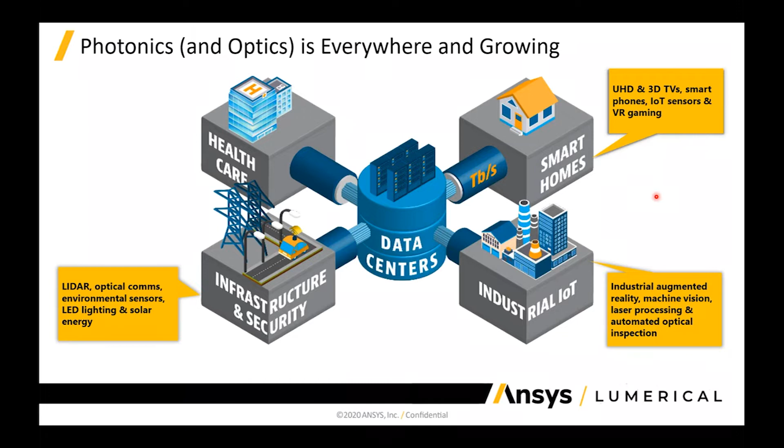There's the whole development on Internet of Things, sensors, virtual reality, augmented reality that use photonics devices. We have the same kind of application in the industrial field with industrial augmented and virtual reality devices, machine vision, laser processing, and so on. In infrastructures and security, LiDAR is widely used, especially if you think of autonomous vehicles. Then we have optical communication, sensors, lighting, displays, solar energy that use photonics devices.

In healthcare, all the work on medical imaging, diagnostics, lab on a chip, and again, augmented reality can help for enhanced surgery systems. And one of the fields that probably had a huge impact over the past 20 years in the photonics world is data center and optical telecommunication, where the race to get higher bandwidth, the fastest internet, with lower cost and lower energy consumption, led to a lot of work in the development of optical transceivers, optical storage, and so on.

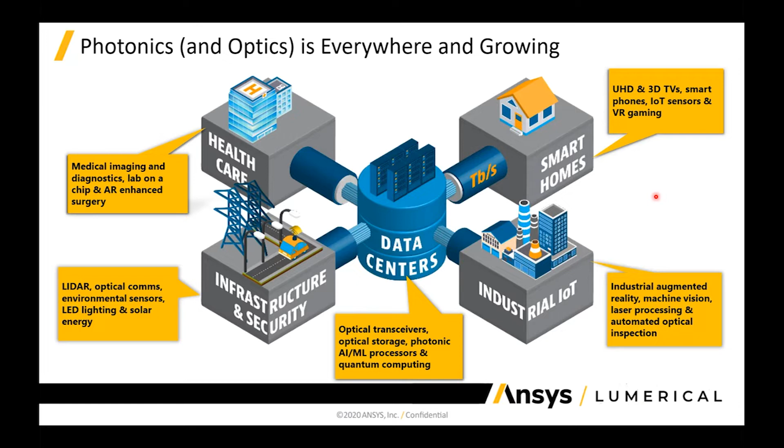So all these are different applications or different fields where photonics devices can be found, and all these different domains definitely pushed the development of simulation tools such as the ones we provide at ANSYS Lumerical. So in terms of the tools that we provide, we can simply split them in two categories.

The first one, which is more where Lumerical comes from at first, is the component level simulation tools, where what we are interested in is simply the physics of what is happening in your device. So there are optical solvers. There are also other solvers that we'll detail in a short bit. So again, here we are talking about a physical device, and we're solving the physics that are happening in this device. And on the other hand, we have the photonic integrated circuit side, the circuit and system level side.

In this case, we're not really looking at the physics behind all the different components, but the circuit. Similar to what we find in the electronics world, each component of the circuit is described by a behavioral model. These models, we'll see in a bit, can be extracted from the component level simulation. But this way of working using a schematic view of your circuit allows you to develop and design very complex circuits that can have tens, hundreds, or thousands of components, and then run the simulations, extract the characteristics of these circuits and optimize these circuits.

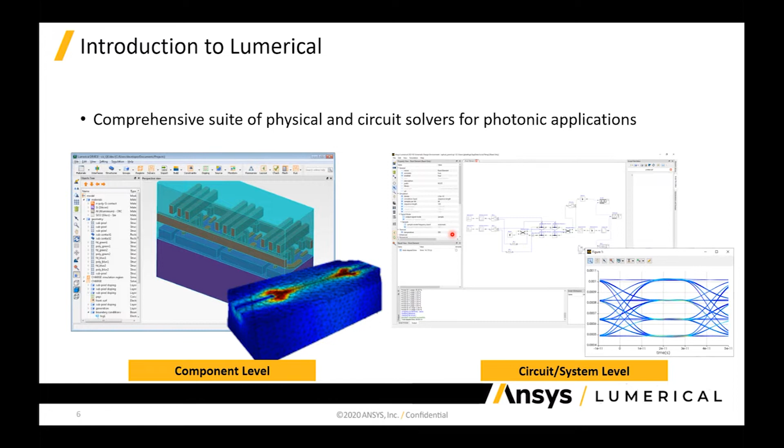So all these different tools share a common set of features. For instance, we have our own scripting language that allows you to drive the simulation workflow, create your structures, your simulation, run the simulation, and then extract the data to post-process and calculate whatever results you are interested in. And then we have an automation API available from the scripting language, but also from Python or MATLAB.

The automation API was designed with the idea of being able to run multiphysics simulations. As we will see in the next slide, our tools cover multiple physics from the photonics side, but also the electronic or thermal side of it. And when you're interested in simulating such devices, such complex simulation workflows, the automation API allows you to have one single script that will drive the full simulation workflow without having to open different scripts. You still have to run different simulations, but everything can be driven from that one single script.

Additionally, and based on this automation API, we have a photonic inverse design module called LUMOPT that allows the optimization of photonic integrated circuit components based on the adjoint method, and I will show a couple of examples later on. So all these features are shared by all of our products.

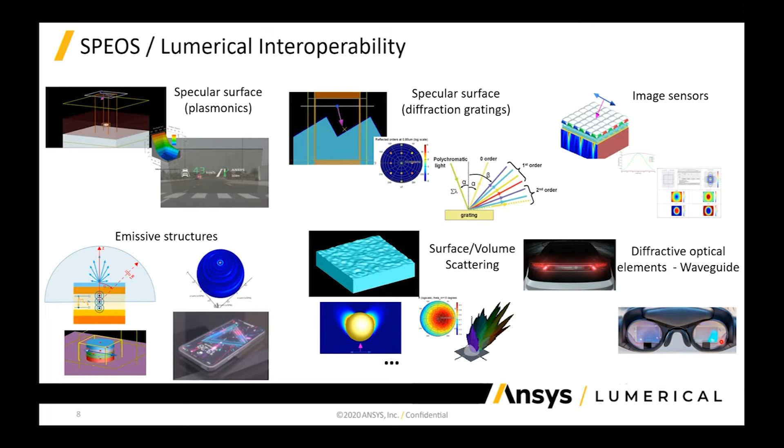And there's other types of applications that we are thinking of and we're currently working on, whether it's surface or volume scattering, where we can extract the BSDF from this surface with FDTD and use that in Speos, or for diffractive optics, like this grating, where we can calculate all the different grating orders, the strength of the different grating orders, and then the idea is to use that in the ray tracing simulation. And this can be used, for instance, in applications like this lighting in a car, but also in augmented or virtual reality applications. So that's for the interoperability with the ANSYS Speos ray tracing software. And that basically ends the part on the component level tools.

So now we're going from the component level to the circuit level with Interconnect. So Interconnect is our photonic integrated circuit, or PIC, simulation tool. As I mentioned earlier, in this type of software, we are not talking about solving the physics of what's happening in a circuit, because simply this would lead to huge simulations and it's not realistic to try and model that. So instead of using the full physics based simulation tools, what we do is we have a schematic view of the circuit, and each component of that circuit is represented by a compact model, a behavioral model. And these models can be extracted from the component level simulation tools, as I will talk about in a bit.

And so what Interconnect can do is simply simulate these circuits in the frequency domain and in time domain. So in frequency domain, what we can extract will be the transmission spectrum of the circuit, and in the time domain, we are more interested in things like the signal integrity and extract like the eye diagram of the circuit.

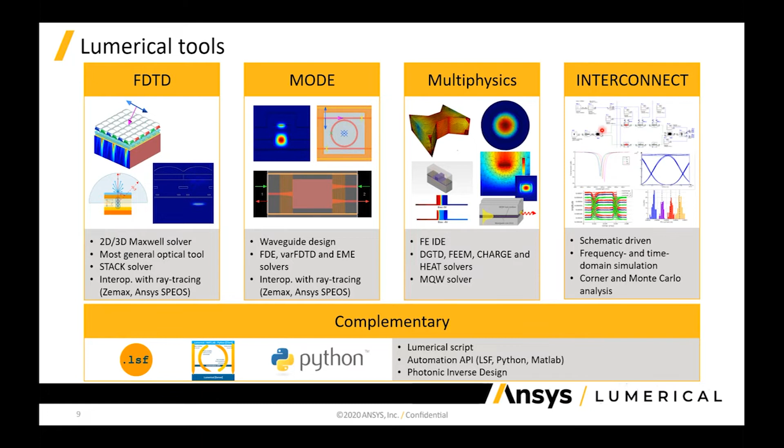Additionally, Interconnect supports statistical analysis, so we can run corner analysis and Monte Carlo analysis. The idea being to be able to determine the yield, the manufacturing yield of your device, your circuit. So, as I mentioned, we need compact models in order to describe the behavior of these different components. And in order to help generating libraries of compact models, we developed a tool called the CML compiler.

So the CML compiler is simply allowing to automate the generation of these compact models for Interconnect using simulation data, but also experimental data. So this is primarily designed for foundries or companies or groups that are developing, let's say, a fairly large library of components as part of a process design kit.

In this case, the advantage of using a tool like the CML compiler is simply because you can automate this process, it's much easier to deal with multiple iterations of your process and different versions of your libraries, and makes things much easier for that. So as I said, the CML compiler will generate compact models for Interconnect, but it also generates Verilog models that can be used in the electronic photonic design automation flow that we have with our partners from Cadence.

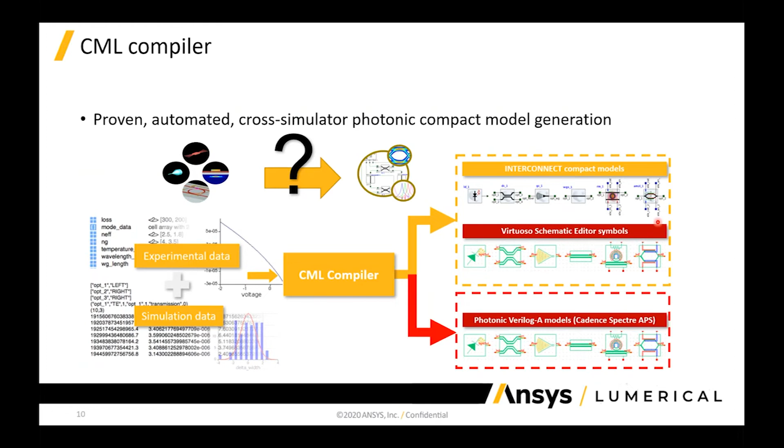So in this case, we're using the Cadence Virtuoso environment to drive the simulation. I'll talk about that in a very short bit. And since these environments will use Interconnect or can use Interconnect as the photonics simulation engine, we need a bridge between the Cadence view of the circuits, of the components, and the Interconnect library of components.

So this came up simply from a realization, and obviously we're not the only ones to kind of think about it. It's simply that there's a lot of similarities between what happened something like 50 years ago in the electronics world and what is happening now in the photonics and the integrated photonics world, with this idea of having a simulation workflow that is centered around the process design kits.

So the process design kits will include all the information about the manufacturing process, the design rules, the process data, the layout of all the different components that are available in this PDK. And most important for us at ANSYS Lumerical will be the library of compact models that will allow the simulation of these circuits using these models.

But the first thing when we talk about a process design kit and a library of compact models is simply that you have to generate these compact models. And to do so, you need photonics multiphysics simulation tools like the ones provided by ANSYS Lumerical, and also you have to be able to calibrate and characterize these components using measurements. And that's where the CML compiler can help in order to automate the extraction of the data from the component level simulations and the measurements to build these libraries of components using all these data.

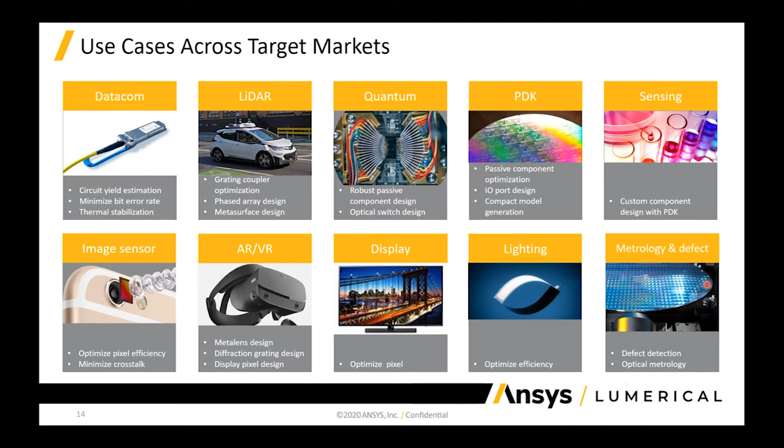So for the photonic integrated circuit side, we have datacom applications, LiDAR, quantum photonics, process design kit development, as I just talked about, as well as sensors. And then we have image sensors for cameras, like pixel simulations. For augmented and virtual reality, we can do metalenses, diffraction gratings, and display, like LEDs. These can also be used for display applications, so optimizing the emission of your pixels for lighting, and also metrology and defect. So I want to go over some of these applications in the next few slides, starting with the PIC side, so the photonic integrated circuits.

So the first thing when you talk about PIC and photonic integrated circuits is we need to talk about the building blocks that we need to be able to build a photonic integrated circuit. And the first building block that we have is simply the waveguide. Without waveguides, you don't have any photonic integrated circuit. So it's the equivalent of the wires on your electronic circuit.

So for the waveguides, we have the capabilities to calculate the modes that can propagate in a waveguide, and we see an example here, the SEM picture of a waveguide with a cross section, and here what would be the simulation of a waveguide. So in this case, we have something that is probably a typical silicon waveguide with a width of 500 nanometers and a height of 220 nanometers. And this waveguide supports two modes. We have the transverse electric TE mode and the TM mode with different mode profiles. So a tool like MODE can calculate these properties of these waveguides.

And then the other thing we need to know is how the light is propagating in your waveguide. So in an electronic circuit, we don't really care if there's a 90-degree angle in your cable because the electrons won't have any problem with that.

But you see that if we would do that with a waveguide, we would lose most of the light, and most of it would be reflected or lost. So we have to be able to model a bend waveguide and calculate, for instance, the losses due to these bends as a function of the radius. And these are the kind of things we can do with the FDE solver. We can analyze straight waveguides as well as bend waveguides.

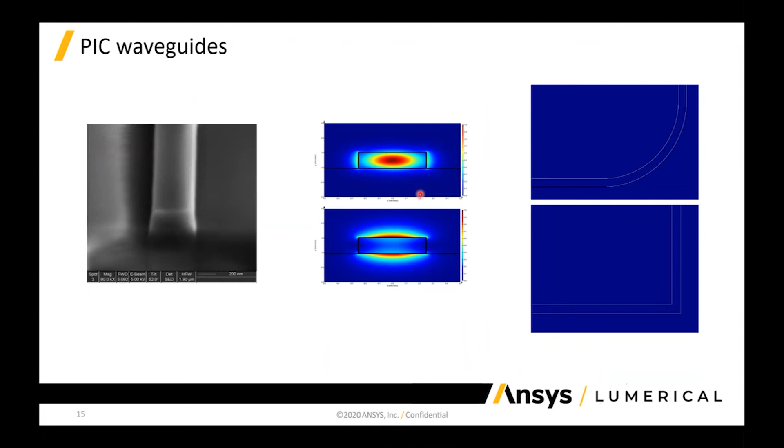So the waveguide is one building block that is very important. And then here we have other types of building blocks. So I will start with these ones that are the passive components. So we have this Y branch, and the idea of this Y branch is simply to split the light from one waveguide to two waveguides. And ideally what we want is a 50-50% ratio at each output here. And that can be done using FDTD or the varFDTD solver.

Another type of component that is widely used in PIC applications would be ring resonators. So ring resonators are simply filters that can be used like spectral filters. So we have an input waveguide and a ring, and the light from the waveguide will simply couple with the ring, and it will couple back and forth from the top waveguide to the bottom waveguide. And the ratio of coupling will depend on the wavelength of the light at the input. So again, that's something we can model with FDTD or the varFDTD solver.

Or we can even split that in different bits, like the directional coupler, where the light is coupling from the straight waveguide to the bend, and so on to build this structure. So those are two important devices. And then another type of device that we need in photonic circuits is couplers, like these grating couplers. The idea is that you need to be able to couple the light from, let's say, a fiber to the photonics chip that you have designed, and grating couplers are a great way to deal with that.

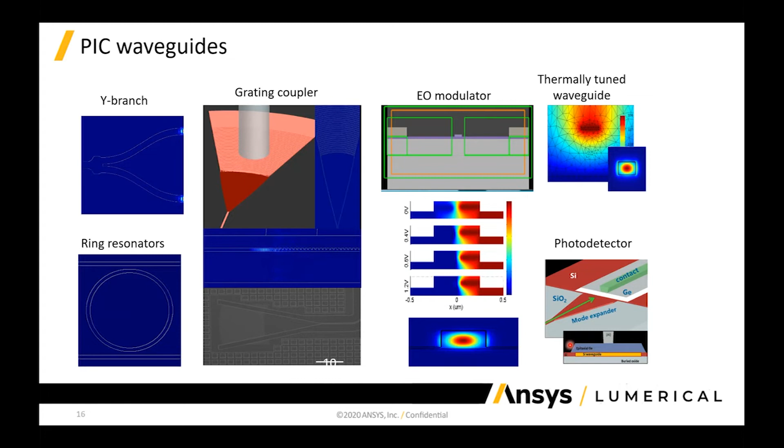So in the FDTD simulation, we can calculate what is the absorption in this germanium layer, and from this absorption, we can then input that as an optical stimulus in the CHARGE simulation to get the photocurrents. And we can also do some analysis to get the bandwidth of this device. I actually forgot to talk about that, but the charge transport solver can do steady state analysis, but also transient and small signal AC analysis that will allow you to get the bandwidth of the device.

So for passive components, one key thing is how we can optimize the performance of your device. So we have multiple tools that allow you to optimize the devices. One tool that we added with the automation API is the inverse design module, or LUMOPT, that is using the adjoint method to optimize the figure of merit. In this case, the coupling efficiency to the selected modes of your waveguides.

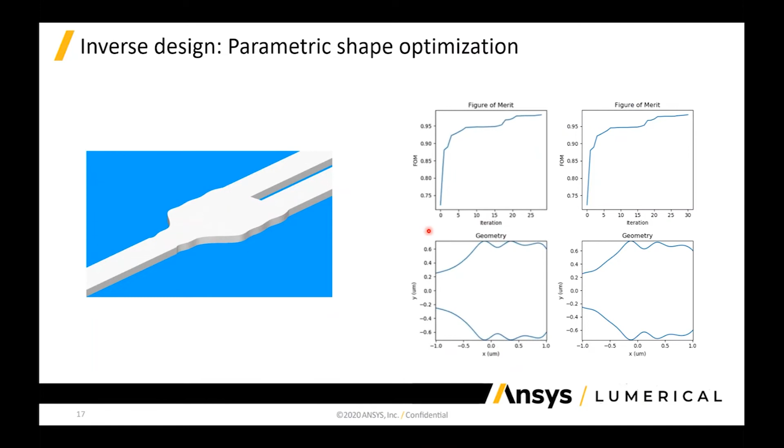So the inverse design can work in two different ways. The first way is the parametric shape optimization. So here, what we will optimize is the shape of this Y branch. You see, at each iteration, we generate a new shape and we calculate the figure of merit. And using the adjoint method, we can optimize fairly quickly this device and get about 100% transmission, knowing that here we are using the transmission in both waveguides, and we're using symmetric boundary conditions. So we know that the transmission is equally split between the two waveguides. So that's one way to work.

And the other way is using the topology optimization. And in this case, the work is completely different. What you optimize is not the shape of the device, but the index profile in a portion of your simulation. So we define a block, and at first, what we're going to do is simply vary the index in basically a matrix of pixels, and for each pixel, the refractive index can vary between two bounds.

The minimum value is typically the index of the cladding, and the max value will be the index of the waveguide. So the first step is a continuous variation where each pixel can take any kind of value, and then we need to discretize that because you can't really manufacture a device where there's a continuous variation of the index. So we discretize that to get a step index type of profile.

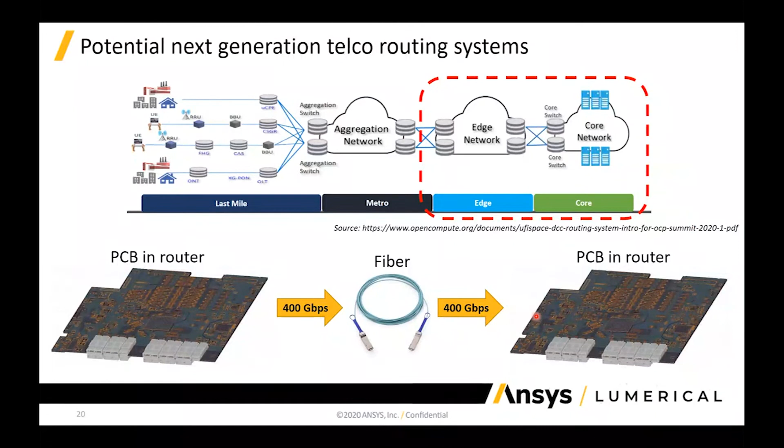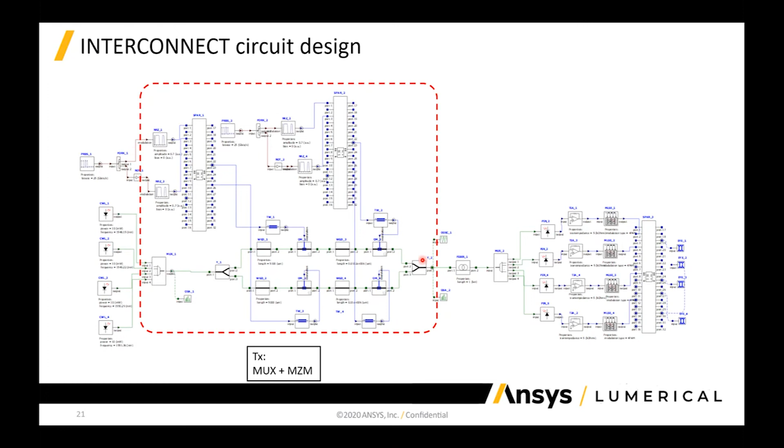And this is a view of the circuit in INTERCONNECT. We have different things. We have the transmitter side, where we have a bit sequence, we have optical sources, and we use all this to modulate the light, convert this bit sequence into an optical signal that is then sent to the fiber.

So what are these different components? We have the PCB here, where we convert the bit sequence into an electrical signal. This has been simulated with HFSS, and we extracted the S parameters of the PCB to, from the bit sequence, get an accurate representation of the electrical signal that will be driving the photonic circuit.

That is symbolized here. We have the traveling wave electrode that I talked about two slides ago. We have the optical modulator, or the phase shifter, and we have the Mach-Zehnder that I was talking about. We split the light here. We have the 2 arms of the Mach-Zehnder. We control the phase of each of the arms, and that allows us to modulate the light at the input of this modulator.

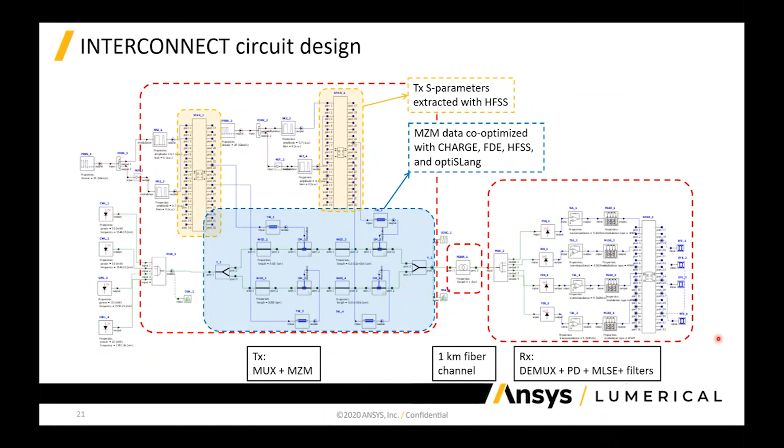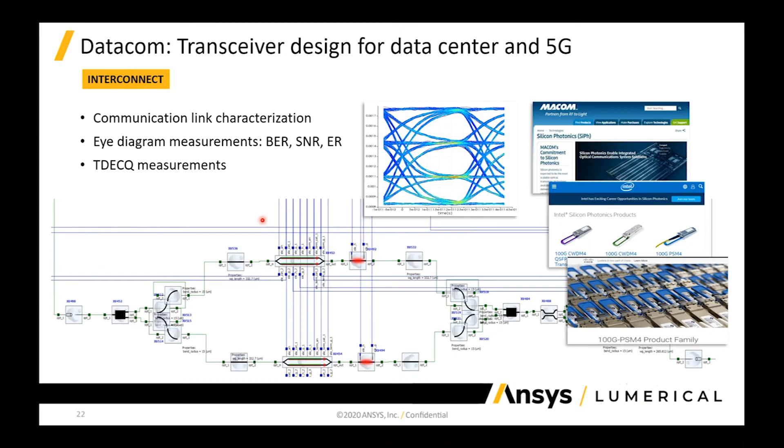And then we have the optical link, the fiber, and we have the receiver side, where we use photodetectors and current detection to extract the eye diagram of this circuit. So this can be used in this kind of transceiver, where we use a complex modulation format like PAM4, and we can extract, like I said, the eye diagram for the different bit levels, and characterize the transceiver, calculating the bit error rate, the signal to noise ratio, and so on.

So another type of application where photonic integrated circuits can be used is LiDAR. As you probably know, nowadays LiDARs are mostly fairly big devices where we steer the beam using a mechanical device. The idea behind this example, based on a paper whose reference is down here, is simply that we can use gratings and phased array gratings to steer the beam.

So we know that if we have a grating like that, based on the wavelength, the width of the waveguide, the width of the corrugated side, and also the period of the grating, we know how the light will be coupled out of the grating. Obviously these physical properties are fixed, but if we vary the input wavelength in this grating, the angle of the output beam out of this grating will change with the wavelength. So that allows us to steer the beam in one direction.

And then what we can do is, instead of using one grating, we use an array of gratings where we control the amplitude and the phase difference between each of these gratings.

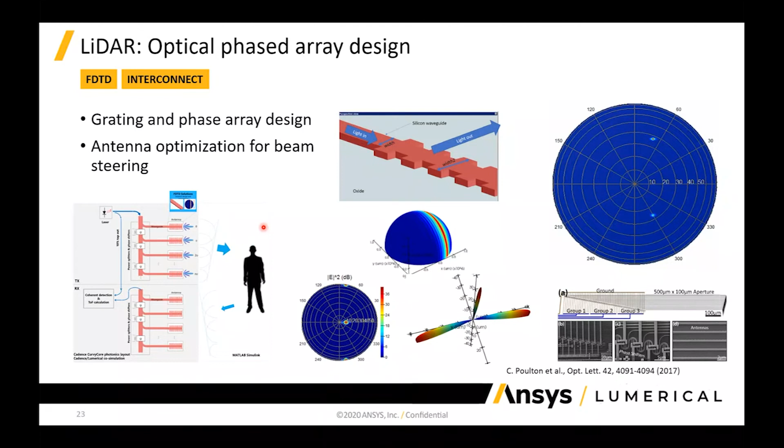So this is another way to use photonic integrated circuits in a very different type of application. Another type of application where we can use photonic integrated circuits will be sensing and lab on a chip, for instance. So here we have simply a photonic circuit symbolized here, and what we use is that if we change the optical properties of the material that is close to the waveguide, it will change the properties of that waveguide. It changes the refractive index and the effective index of the mode of that waveguide.

And so in this application, we simply run an optical simulation of the waveguide using the transverse magnetic mode of this waveguide, and we sweep over the refractive index of the material close to the waveguide and see how the effective index changes as a function of this surrounding refractive index.

And then using a similar Mach-Zehnder interferometer configuration, we can show that if you change the material properties close to the waveguide, it will shift the transmission spectrum of this Mach-Zehnder. And this allows us to detect materials surrounding the waveguide, and use that type of circuit as a sensor for biological applications.

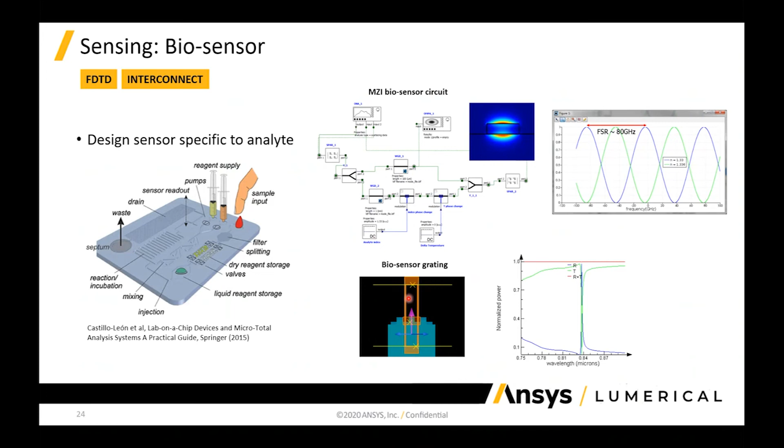Another type of sensor, not really for photonic circuits, would be to use gratings. We know that the transmission of this grating will be affected, similarly, by the refractive index of the material surrounding it. And so by monitoring how the reflection and transmission coefficients of this grating are affected by the surrounding index, we can know if a material is present or not nearby the grating. So that's about it for the photonic integrated circuit side.

And now I want to go over quickly, because I'm running a bit late, some of the applications that I mentioned before. For instance, we have the CMOS image sensor, widely used in your mobile phone camera. And what you can do with the numerical tools is optimize the pixels, to avoid crosstalk, optimize the absorption and so on.

So we see an SEM cross section of the pixels. We have micro lenses, color filters, different layers, different metallic vias, and then the absorbing region that we are interested in. And in a top view, we have a full pixel made of 4 subpixels with different color filters for green, blue, and red colors. And we can then look at how the light is absorbed by the green pixel.

And we see that the light is focused by the microlens, goes through the filter, and then can be diffracted by different elements. And we could see, if the pixel was not nicely designed, that there could be some crosstalk and light diffracted from the green pixel to the red pixel, creating some weird effects. And so the full optical part of this simulation workflow can be done with FDTD.

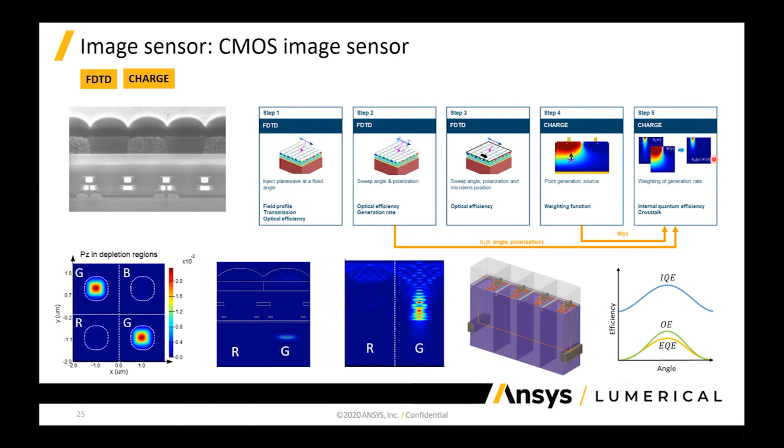calculate a weighting function, basically using a point generation source. We move that source all over the device, and for each position, we can know what is the probability of an electron hole pair generated at that position to be collected by this photodetector. So once we have that, we have a map showing the probability of an electron hole pair to be collected. We can use that and combine the absorption from the photonic simulation that will depend on the optical configuration, and combine that with this weighting function to extract the internal quantum efficiency of that device.

So another, completely different type of application will be for augmented and virtual reality. It is meta-lens design. So in meta-lenses, we have this unit cell, which is a simple cylinder, and we can vary the radius and the height of these cylinders to control the phase and the transmission of that. The idea here is by appropriately distributing these cylinders with the right radius and height, we can control the phase of the light as shown in this animation. We illuminate with a plane wave, and we see how this device will affect the phase fronts

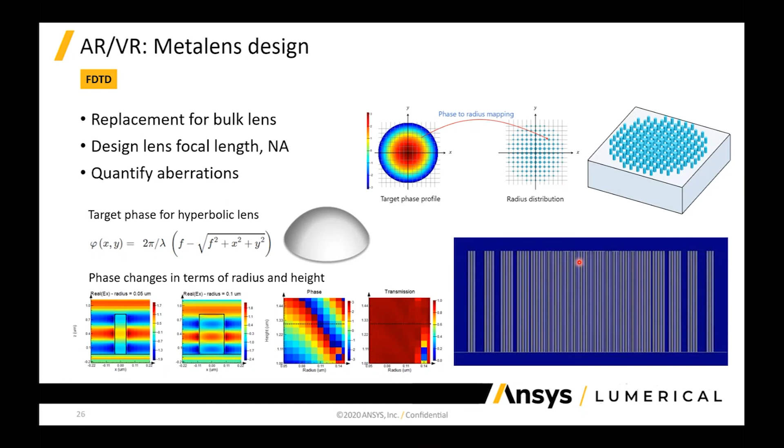of the light. And so this simulation workflow will start with a lot of simulations of these unit cells, where we calculate the phase change and the transmission. And knowing that, and knowing what is the target phase distribution, in this case we are targeting this hyperbolic lens, we can extract what would be the distribution of radius and height for this meta-lens, and then calculate the full behavior of the full meta-lens. Obviously, that would be a bit challenging in terms of simulation size, but then we can check the focal distance and so on.

So another kind of application where our tools like FDTD can be used will be for display, and in this case, we're using liquid crystals to steer the beam in our device. So we see the liquid crystal itself. We use a Gaussian beam, and we spatially modulate the orientation of the crystals, and this allows us to control the direction of the output beam. And you see that the beam is now at an angle, and this can be done using FDTD and the anisotropic capabilities that we have, where we can modulate the full tensor for the permittivity.

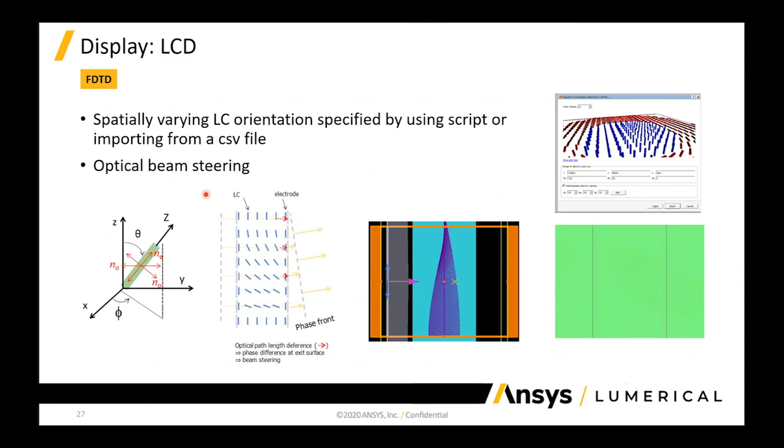Another application that I mentioned, mostly for the interoperability between ray tracing and the photonic side, will be for lighting, like organic LEDs or LEDs. In this case, the main thing we are interested in will be the emission pattern of that OLED or LED, and that can then be used to build a full matrix and a full display. And so either you can consider your emitting structure simply as a system of multiple layers stacked together, and you know the thickness of each of these materials, the material properties, and so on, and we have the emission of this material on one specific layer, and we can use the stack optical solver to extract this emission diagram and all the different characteristics of these layers.

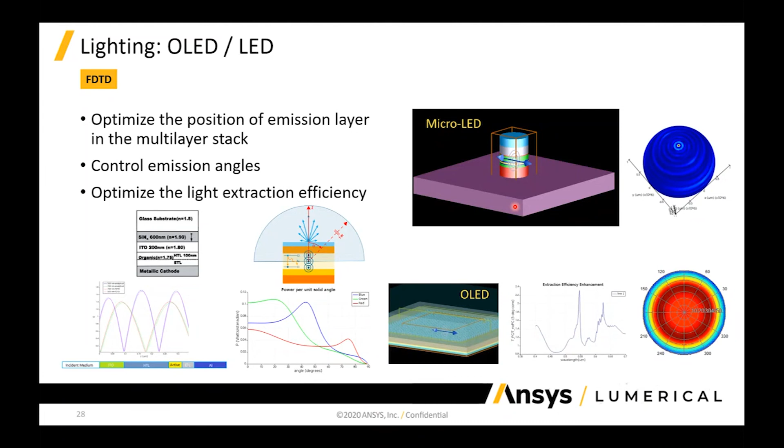Or if your emitting structure has a limited size, about the same scale as the wavelength, then you can use FDTD to do the same type of simulation, except that in this case it will be a bit slower, in the sense that we have to run full 3D simulations, and we also need to run multiple simulations in order to fully characterize the emission pattern of that LED. And then, as I said earlier, we can use these FDTD or stack simulation results to build a full display in a tool like Speos.

And the last application that I will briefly talk about will be for optical metrology and defect detection. The idea behind this workflow is simply that we can decouple the optical system for the illumination and the collection from the actual FDTD simulation. So what we do is we will run a series of simulations with FDTD where we simply change the incidence angle, and so basically we simulate the response of the system, the reflection of the system for all the

angles that are supported by the optical system, and then we apply the illumination and collection path as post-processing, which means that for one set of simulations with FDTD, we can change the illumination and collection properties and try to optimize that separately, which will be much faster than trying to model the full system for your needs. So yeah, that's about it.

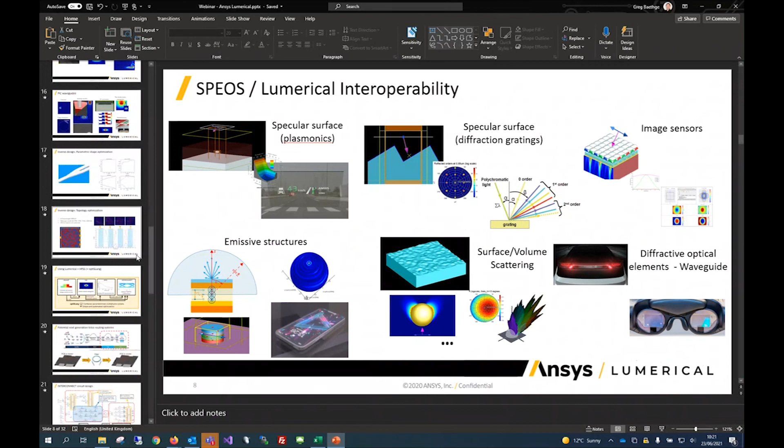Yeah, there's different things we think of, and another example is with optiSLang, because optiSLang has a very powerful optimization algorithm that can be used to drive the simulation flow, and so this is a work in progress. I think the optiSLang interoperability will be available with the 2021 R2 release next month, and so users will be able to start playing with that.

And I played a bit with it. Obviously, I have no experience with optiSLang, so it makes things a bit more difficult for me. But I definitely see a huge potential to facilitate the optimization of devices with this combination of different tools.

Yeah, that's valid definitely for all the portfolio of ANSYS, as we already had talks about ANSYS Speos cooperation with optiSLang to optimize the workflows of our clients. So I'm happy to hear that it will also be possible with Lumerical programs.

Absolutely. I'm just seeing there's a few questions in the chat. I will need your help because I think some might not be in the right language for me. I can just reply to the two that are in English.

So in terms of the wavelength range, our tools are primarily meant for photonics applications. At the end, the physics is the same as long as we're talking about electromagnetic waves propagating in a structure.